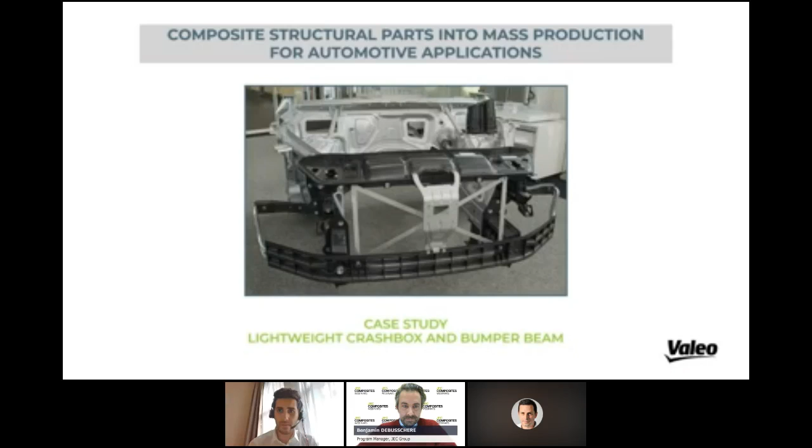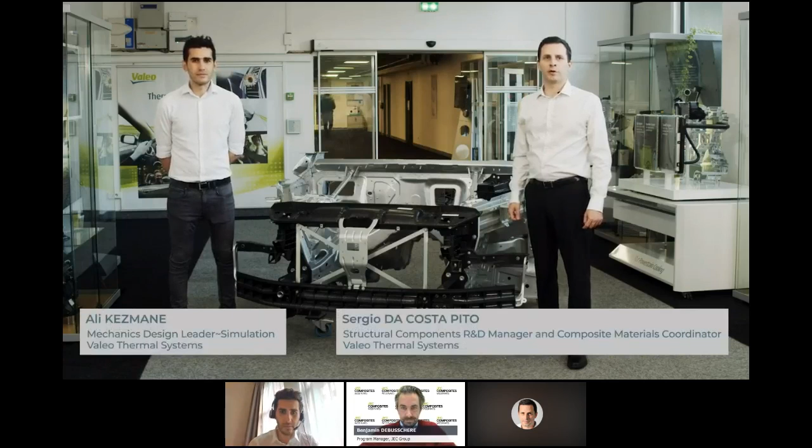Good afternoon and good morning, everyone. Thank you for participating in this webinar. A few words about Valeo and more specifically the domain we work on, Ali and I. Our product group's scope is to develop structural and airflow solutions assembled and delivered in just-in-time in order to improve safety, thermal efficiency of passengers' cars.

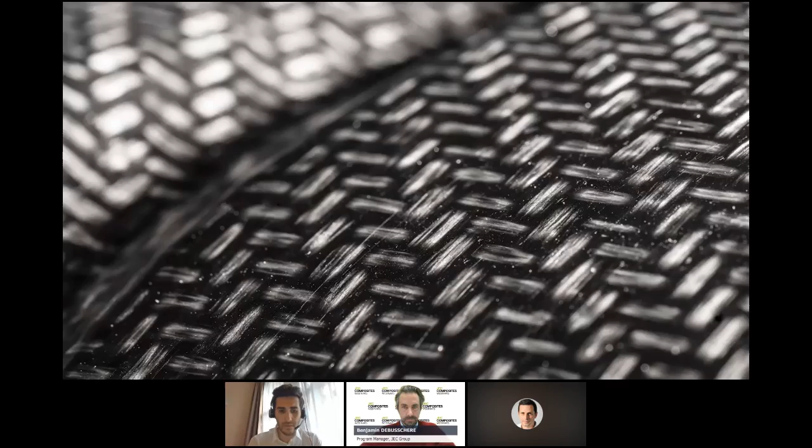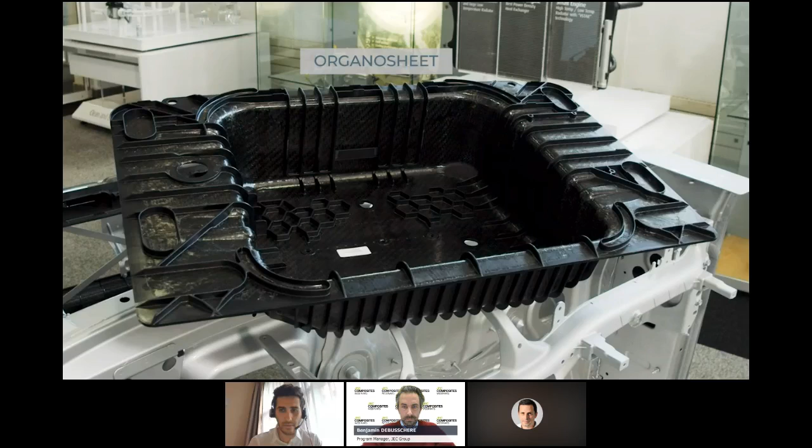Looking for lightweighting solutions, a key driver in automotive for fuel consumption reduction and EV driving range extension, we started seriously investigating composite materials that were easy to process and compatible with plastic injection. We selected a composite material named Organosheet and introduced a lightweight composite bolster in 2018, a world premiere with Daimler. A composite battery casing with the same OEM followed this year. Our latest project is to develop a composite bumper beam solution as showcased here.

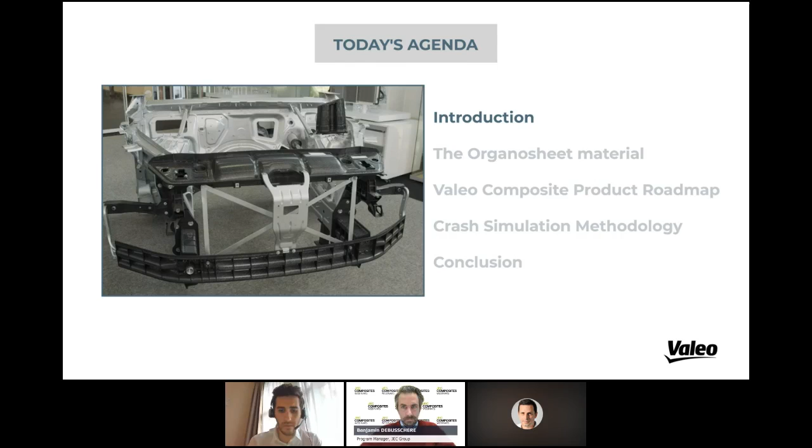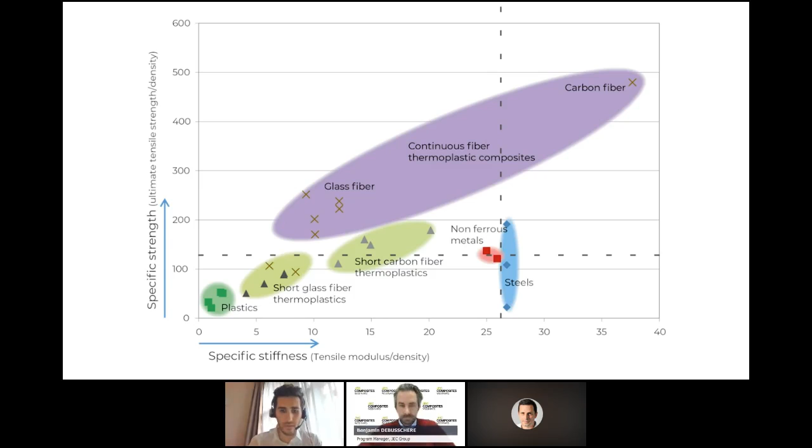Vertical and horizontal dotted lines show that if you are looking for lightweighting and robustness, a glass fiber organosheet is to be preferred. Besides, glass fiber solutions remain affordable, whereas carbon fiber is not economically sustainable. That is why glass fiber organosheet was fully relevant for the bolster application, for which robustness is key.

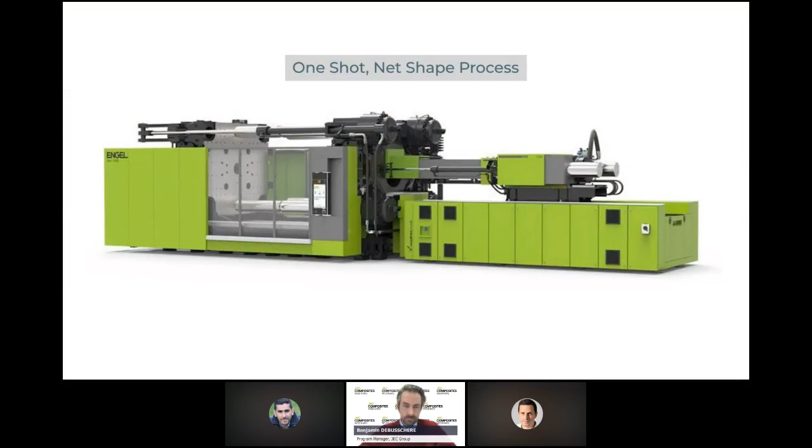Being located at the vehicle front end, the same logic applies for the crash boxes. The second reason why we selected glass fiber organosheet is that it is resin pre-impregnated and can be processed in standard injection machines in one-shot net shape. In a single process phase with prior thermoforming, finished parts are ready to be shipped. The very short production cycle is ideal to address a mass market like that of automotive.

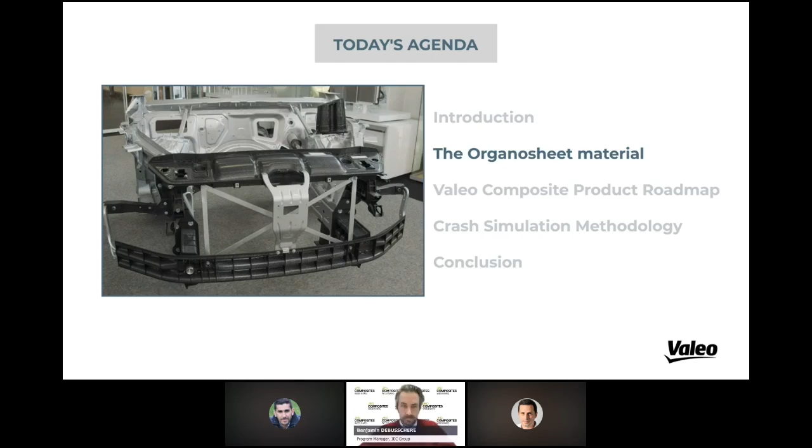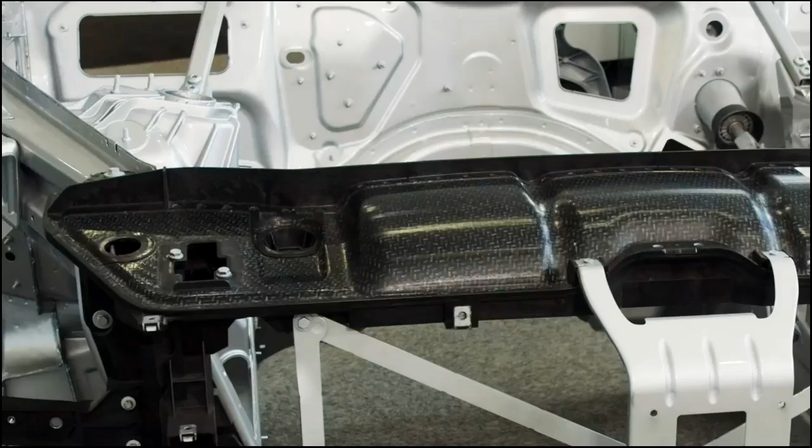From there, our product roadmap comes almost naturally. As we are vehicle front-end specialists, the first application was the bolster, then the Crashbox and bumper beam, which can be located at the back of the vehicle, and the new product line for us, the battery casings for electrical vehicles. As we have developed the competence, discussions are ongoing out of our usual scope, and that is very exciting.

The production of the bolster started in 2018 at our US plant in Smyrna, Tennessee. We produce 320,000 per year.

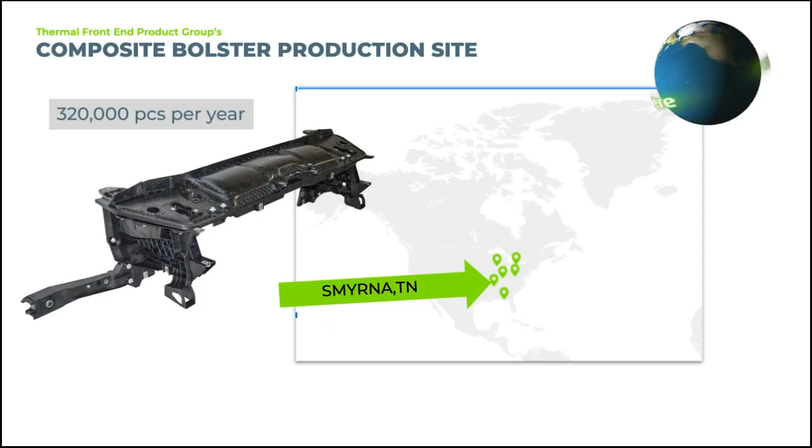This part replaced a hybrid steel plastic solution with a weight reduction benefit of 30%. This world premiere in automotive was recognized by the industry with a PACE award and won an accolade from the Society of Plastic Engineers. For hybrid vehicles, a weight saving of 30% means reduced CO2 emissions, and for full electrical vehicles, it translates into extended range. These are major concerns for the automotive industry.

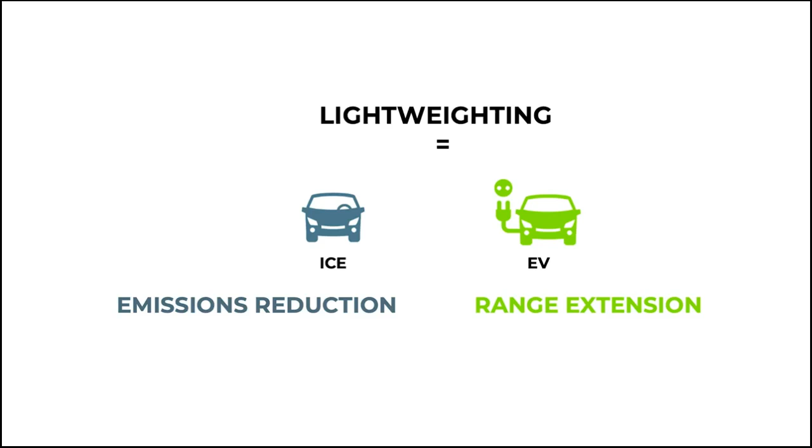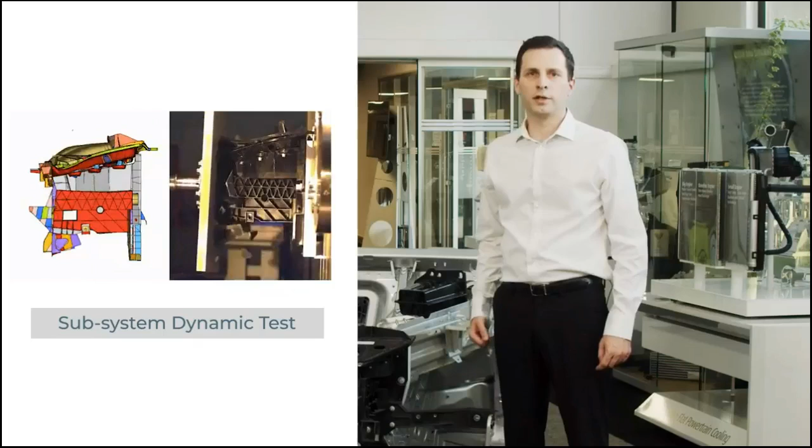While developing that product, we focused on crash energy absorption, and that is how we built our expertise in composite materials for that kind of application. Composite covers fully contribute to the crash performance thanks to a high level of strength combined with good ductile behavior. The move to composite crash box development, for which energy absorption is key, came naturally.

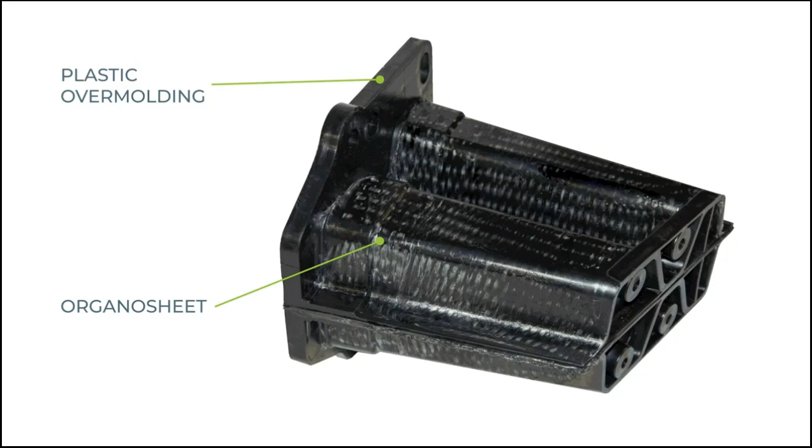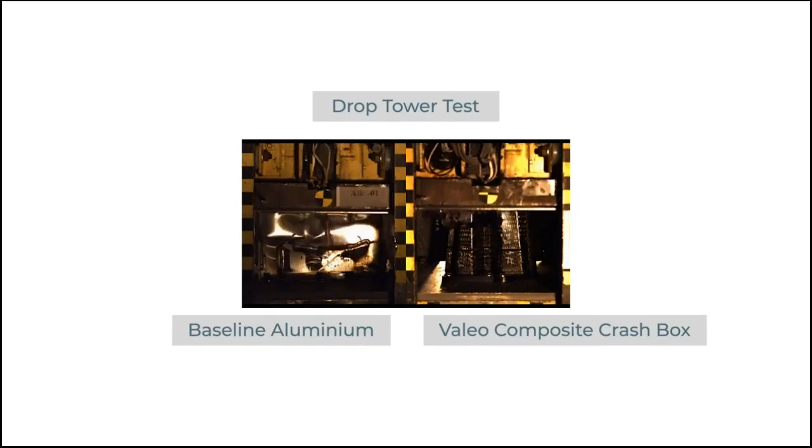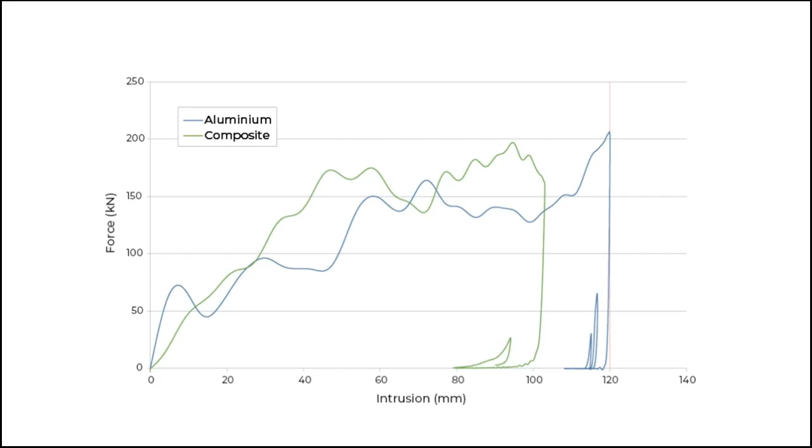This part is made of plastic overmolding and organosheet insert and patch. We performed drop tower tests and compared our solution with a serial solution in aluminum that demonstrated the significant advantage of glass fiber organosheet in terms of performance and lightweighting. Minus 20% less mass versus aluminum, and the gap is even bigger versus steel. The graph shows that for the same level of energy absorption, a smaller stroke is required.

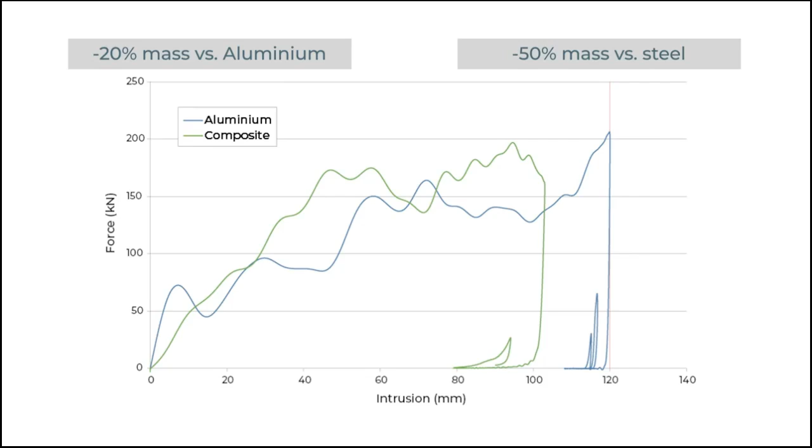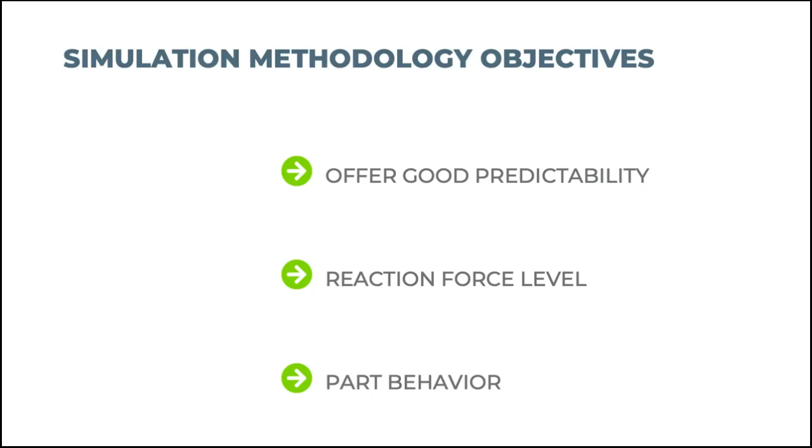Performance and lightweighting were of course targeted during the project, but we had also decided to develop a simulation methodology. The objective was to offer good prediction of failure, reaction force level, and part behavior when used for future developments, where severe loading in impact crash is central. It ensures a standard development, and that is highly appreciated by our customers.

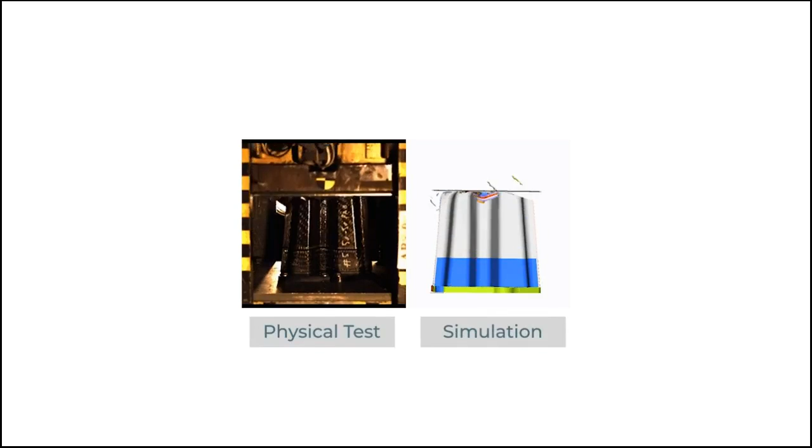Our simulation methodology is based on both material cards calibration, including strain rate dependency and failure criteria based on plastic work, so that it corresponds to the physical testing. In addition, we conducted a systematic correlation work with physical tests to validate the simulation protocol. The crash methodology was tested on other applications, and we had confirmation it is transposable to other products than the ones we presented today.

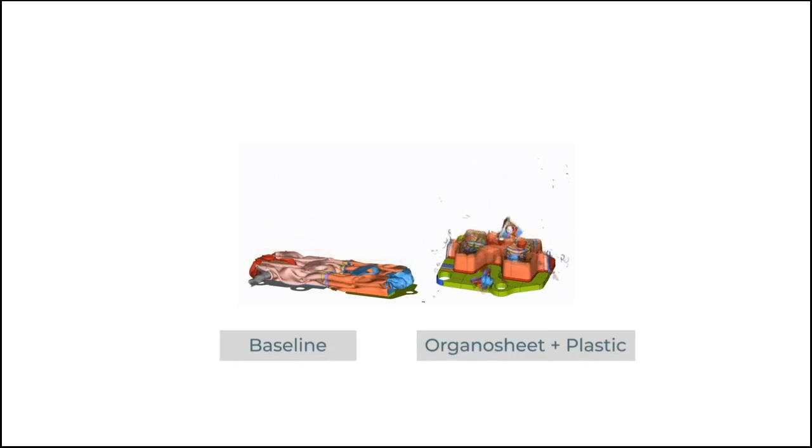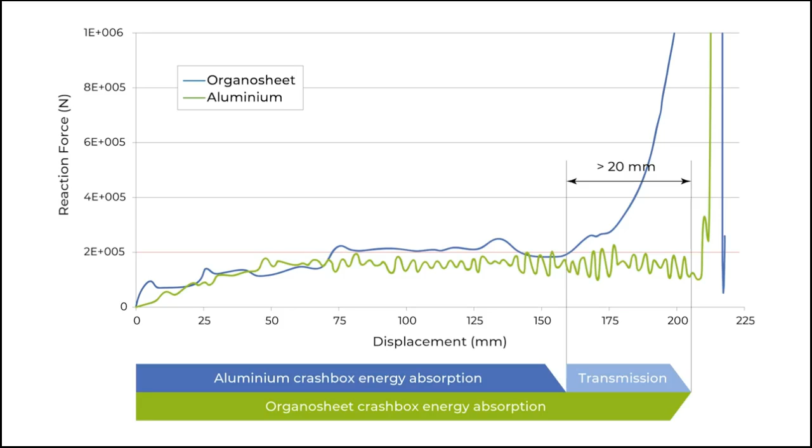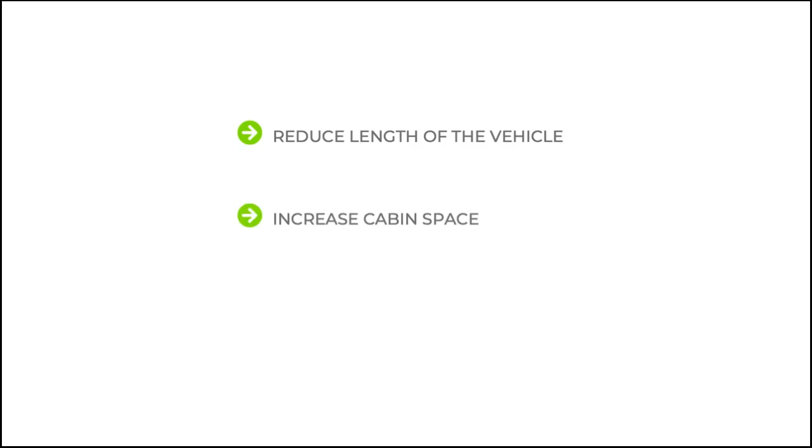With the powerful simulation tool, we can bring forward the multiple advantages of composite, and particularly one of them, their incompressibility threshold. For the crash box, for instance, there is a 20mm difference between the composite and aluminum. For the OEM, this means that they can either reduce the length of the vehicle or increase cabin space or improve crash performance.

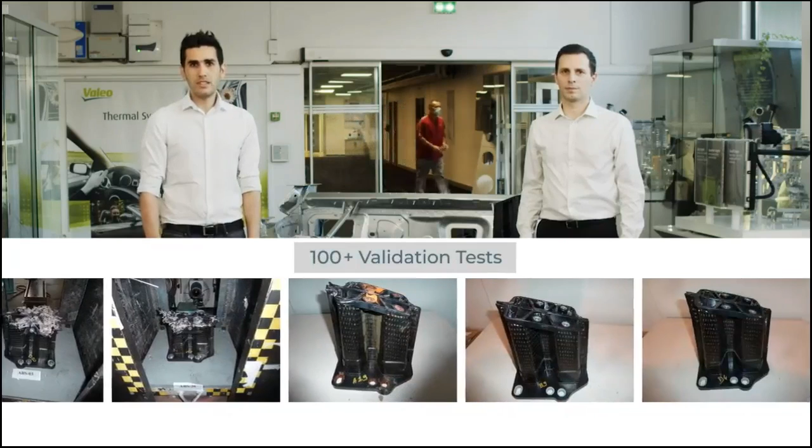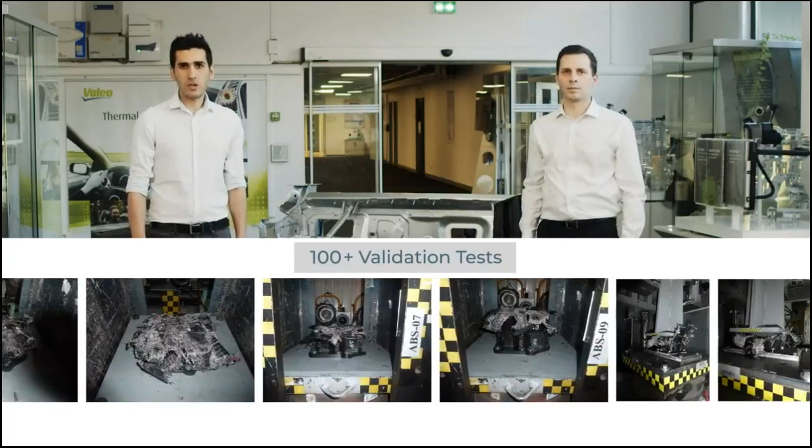We have run complete validation procedures, physically testing the product at various speeds, temperatures, and aging states. In total, we ran 100 tests on the crash box alone and bumper beam plus crash box as well. We have thus reached a significant maturity level that allows us to propose the tool when we work on customer developments. From design to final part, our crash boxes and front and back bumper beam, including the possibility to add a towing hook, are ready for RFI and RFQs.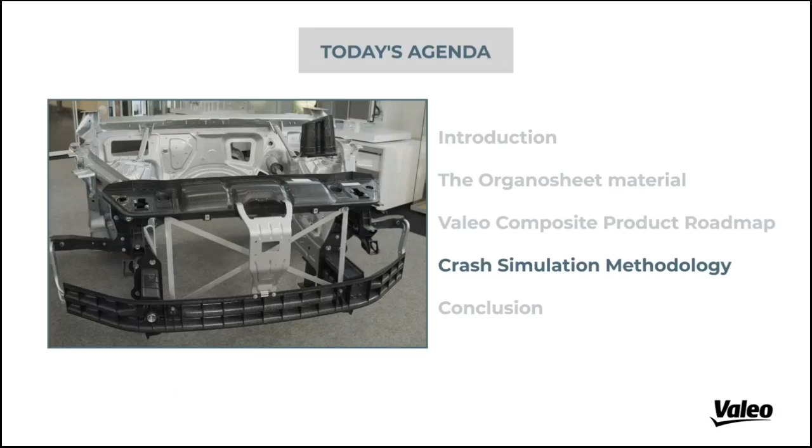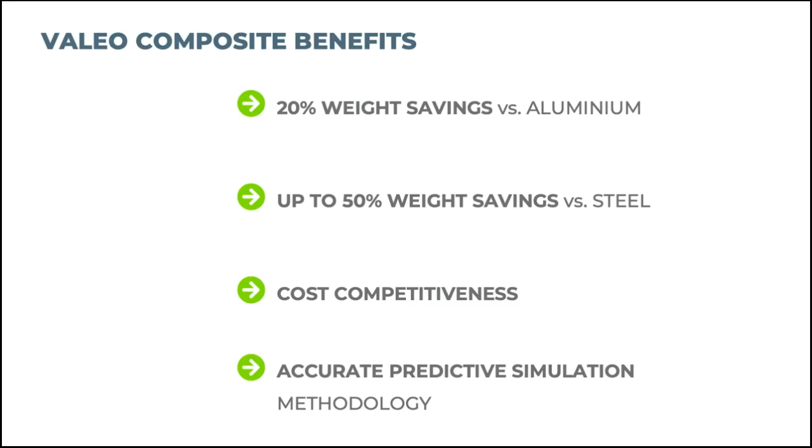So to summarize our approach, the composite material we selected offers 20% weight saving versus aluminum and up to 50% versus steel at competitive cost. We built a precise and accurate simulation methodology to support customer development, and we are now ready to tackle any project you would like us to work on, even in new fields. Thank you for your attention. We are now looking forward to answering your questions.